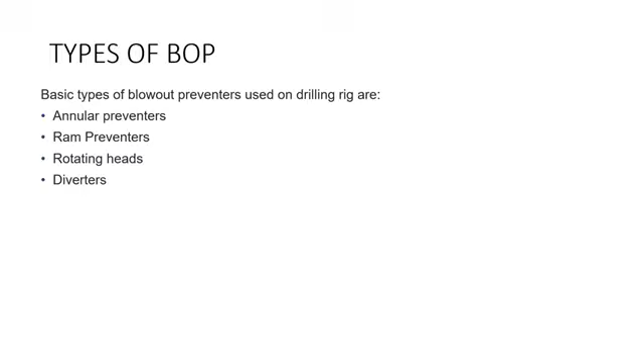Now let's discuss well control equipment. The very first thing we will be discussing is the blowout preventer. Types of blowout preventer, as we all know, include annular preventer, ram preventers, rotating heads, and diverters.

Now coming to the annular preventer, it can be closed on drill pipe, drill collar, casing pipes, square and hexagonal kelly, tapered pipes, tool joints, wire line, and on open hole in case of emergency. So any kind of tubular present in the well, the annular preventer can close the well.

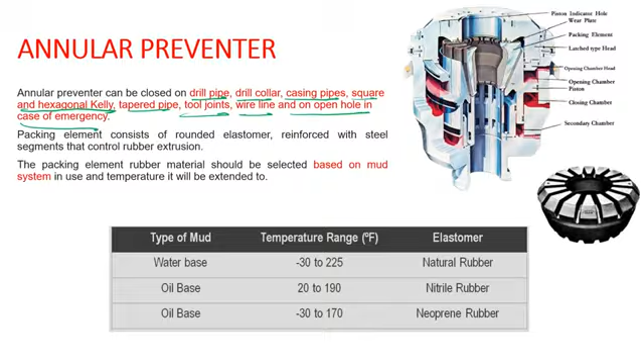The packing element consists of a rounded elastomer reinforced with steel segments that control rubber extrusion. The packing element looks somewhat like this. It is an elastomer reinforced with steel - you can see the steel elements here. Basically it's an elastomer reinforced with steel segments so that we can control the rubber extrusion. The bottom part is the rubber extension, and these segments are the steel part.

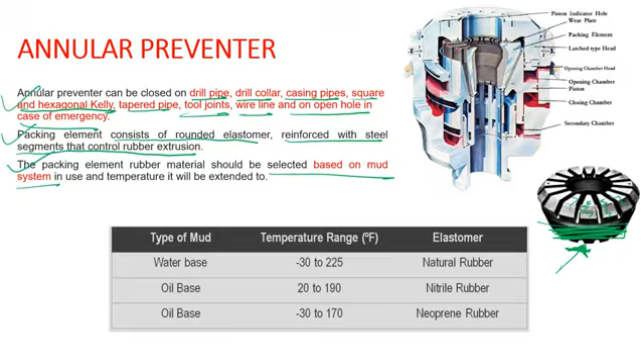Now the packing element rubber material should be selected based on the mud system used and the temperature it will be exposed to. This is a very important point, and this is a very important chart and table.

If I am using a water-based mud and the range of reservoir temperature is expected to be within -30 to 225 degree Fahrenheit, we can go for a natural rubber elastomer. Whereas if we are going for an oil-based mud and the temperature lies between 20 to 190 degree Fahrenheit, nitrile rubber should be used. Similarly, if I am going for oil-based mud and -30 to 170 degree Fahrenheit is expected, we would go for neoprene rubber.

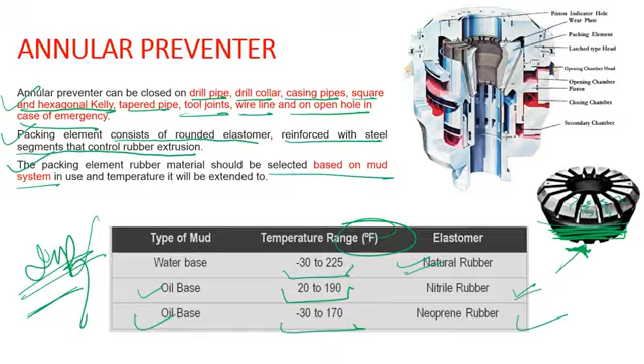This same table will come again when we discuss PCP, progressive cavity pump. At that time, the bottom hole pump assembly that we have - in PCP we have a rotor and a stator assembly - we will discuss this same thing again.

Now coming to ram type preventer, pipe rams. The ram type preventers are designed to seal the annulus by forcing two rams from opposite ends to seal the object in the wellbore, thus closing the annulus.

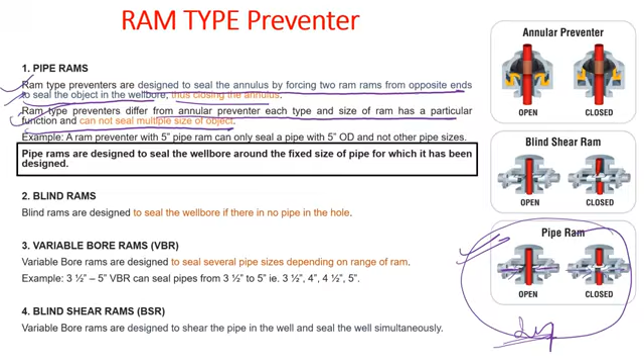Now, ram type preventers differ from annular preventer - each type and size of ram has a particular function and cannot seal multiple sizes of object. For example, if a ram preventer with 5-inch pipe ram is used, only a pipe of 5-inch OD can be closed. If a ram is capable of closing a 5-inch OD drill pipe, then that particular ram will be used to close that 5-inch OD pipe only. It cannot be used for different kinds of ODs - only for 5-inch is it designed.

Pipe rams are designed to seal the wellbore around the fixed size of pipe for which they have been designed. This is a very important point. Unlike the annular, where we were able to close the well with any sort of tubular, or even in emergency if there is no tubular in the wellbore, with a pipe ram it is always designed to seal the wellbore of a fixed size.

Now talking about the second type, which is blind rams. Blind rams are designed to seal the wellbore if there is no pipe in the hole.

Third point, which is variable bore rams. Variable bore rams are designed to seal several pipe sizes depending on the range of the ram. This variable bore ram, or VBR, is an improvement over pipe rams - these are pipe rams only, but now VBR can seal several pipe sizes. For example, a 3.5 to 5-inch VBR can seal pipes from 3.5-inch, 4-inch, 4.5-inch, up to 5-inch.

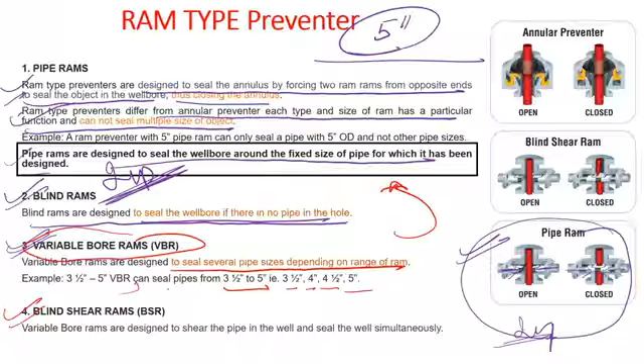Now coming to the fourth point, which is blind shear rams. Blind shear rams are designed to shear the pipe in the well and seal the well simultaneously. That means it will both shear as well as blind. You can see in this particular figure, this is a blind shear ram.

Now from both ends the rams are coming in, and you can see that it has now sheared the pipe on the top end and the bottom end. So what a blind shear ram does is shear the pipe, and once it gets sheared, it closes and gets blind, completely shutting the well.

Unlike the pipe ram, which was not shearing, it was just closing the well by completely covering the OD of the drill pipe. But in a blind shear ram, you can completely shear the drill pipe and shut the well.

Now, when are blind rams used? Blind rams are used when there is no drill pipe in the hole. Only at that time can I go for a blind ram. Annular preventer, on the other hand, can be used when there is any sort of drill pipe or any tubular present in the wellbore. At that time we go for the annular preventer.

In the annular preventer, you can see rubber elements will be there, and on activating it, the rubber elements will come close to each other and close the well.

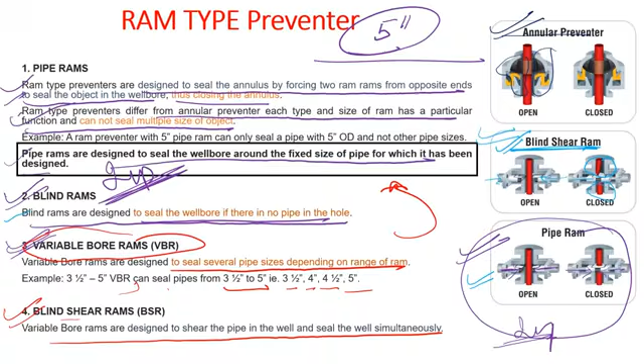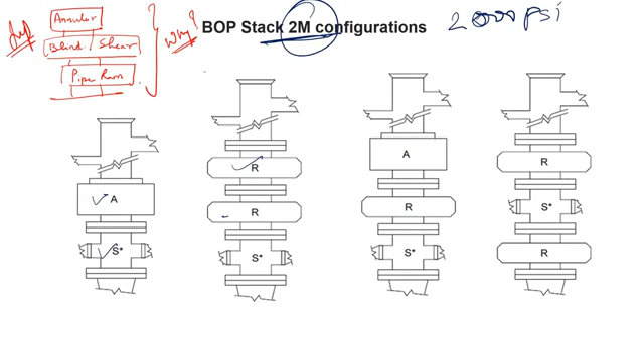Now coming to BOP stack configuration, this is for 2M configuration, that means 2000 psi rating of BOP. So here A indicates annular, S indicates drilling spool, R indicates pipe rams. For a 2M you can go for either one drilling spool and one annular BOP.

The second configuration is one drilling spool and two rams. The third assembly is one drilling spool, one annular, and one ram. The fourth assembly is a ram below the drilling spool and a ram above the drilling spool. So these are the configurations for a 2000 psi working rating pressure BOP.

Now this is a very important question, a GATE type question. Whenever you are going for a shear ram in your system, it is compulsory to have a pipe ram below it. Let's assume a case that I have a shear ram, and above it I have a pipe ram.

Let's say this is my drill string, this is my bit, this is my wellbore. Now let's say by any chance my well has taken a kick and I had to activate the BOP, and my annular didn't work, so for some reason I compulsorily have to engage my shear ram.

At that time, if I engage my shear ram, I know that the entire drill pipe from this point will be sheared. Because of shearing, this drill pipe may fall into the wellbore, and this can result in damage to the wellbore, which is an obvious issue. Now if I want to retrieve that drill string, I have to go for a fishing job.

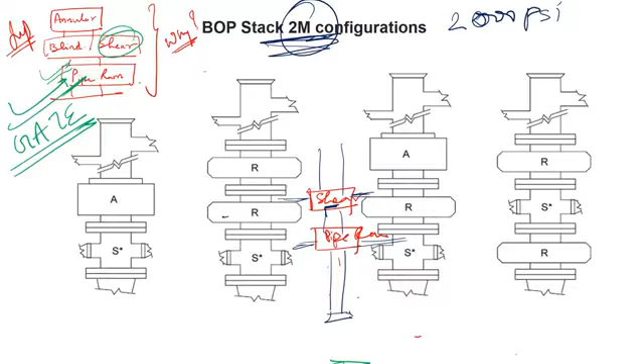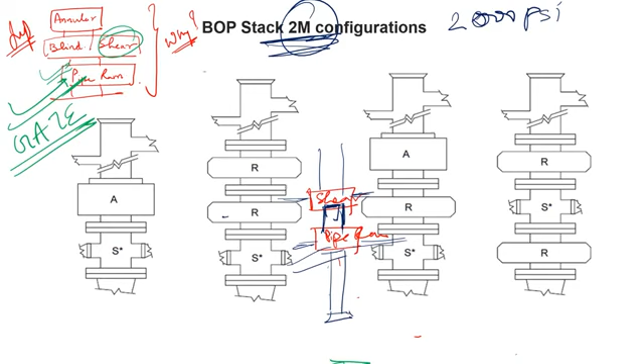Again, let this be the drill pipe. Now in this case, if I am engaging my shear ram, I will simultaneously engage my pipe ram also. So if the drill pipe gets ruptured because of shearing, this pipe ram will hold the entire drill string intact, meaning it will not allow the drill string to fall into the wellbore. Got it? So this is a very important point, and this particular question can be asked in GATE.

Now coming to 3M and 5M. 3M means 3000 psi of working pressure and 5M means 5000 psi of working pressure. If I am going for those kind of stack configuration, then I can have an annular preventer, two ram preventers, and a drill spool.

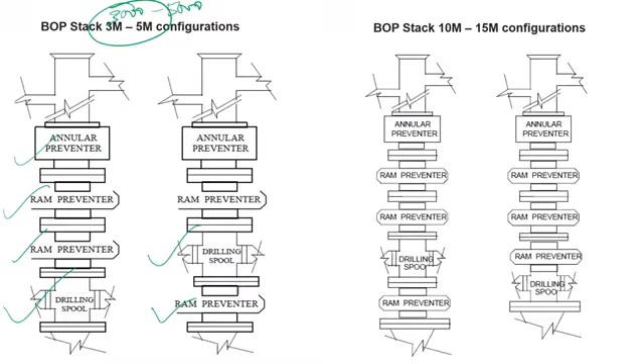Another version is I can have a drill spool, below that a ram preventer, above that another ram preventer, and above that an annular preventer.

Now for a configuration of 10M to 15M, I can have a ram preventer below my drill spool, two ram preventers above my drill spool, and one annular preventer. This particular configuration can have a drill spool at the bottom, 3 ram preventers, and 1 annular BOP. So you can have different types of configuration based on the company's SOPs and the API specifications.

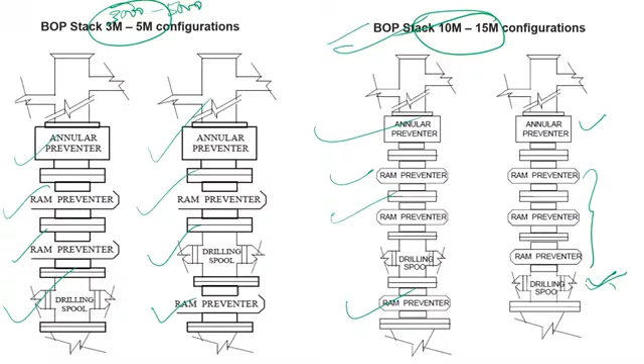Now this is a schematic for a BOP. Let this be the drill floor, and this is my annular preventer, blind shear ram, 5-inch pipe ram, and drilling spool. Again, I will have a pipe ram below because I have a blind shear ram - that means compulsory I will have a pipe ram below. Let this be the casing head.

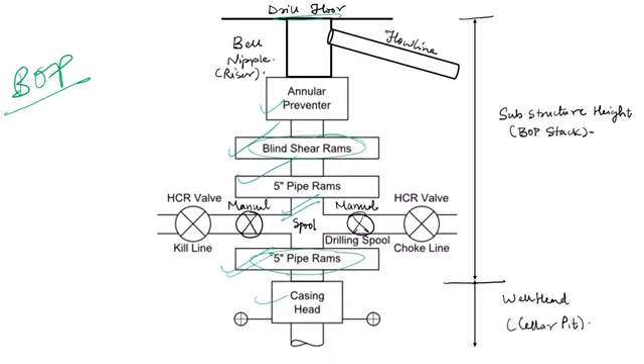Now this side is my kill line. I have this manual valve, and I have this HCR valve, which is a hydraulically controlled gate valve. This is my kill line, and similarly I will have a choke line over here.

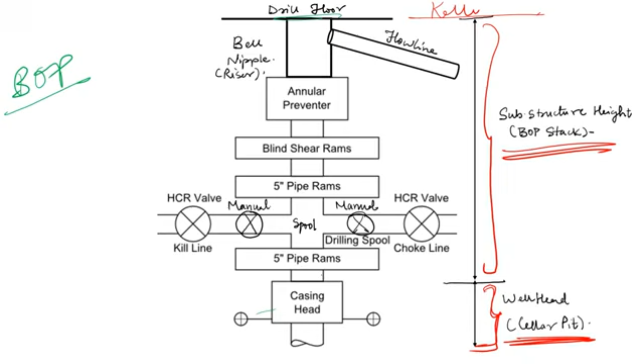Now this would be my wellhead case, or this will be a cellar pit. This particular depth is cellar pit. This particular height is my substructure height - the height from the drill floor, or the Kelly bushing, right from the Kelly bushing to the top of the wellhead. So that would be my substructure height or BOP stack height.

And from the annular preventer, I will connect a bell nipple or a riser towards my drill floor, and from the drill floor I will have a flow line. Again we know the journey - from the flow line it goes to the possum belly, shale shaker, then to the drilling fluid control system. So this is a simple schematic of a BOP configuration.

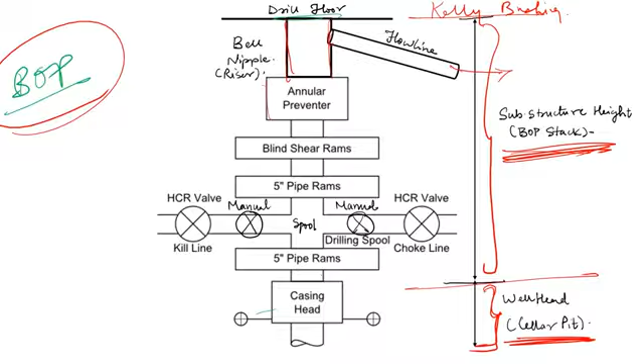Now coming to diverters. Diverters are used in top hole drilling to divert the flow in case of a shallow gas kick or a water kick. A very important term - it is used in top hole drilling only, to divert the flow in case of a shallow gas or a water kick.

Diverter is never used to create a back pressure on the wellbore, as compared to annular BOP, pipe ram BOP, or blind shear BOP, where we were able to give back pressure. But in my diverter case, I am never able to create any sort of back pressure - that's a very important point to take into consideration. Diverters are simply low pressure annular preventers - these are annular preventers only, but low pressure, and they cannot give back pressure on the wellbore.

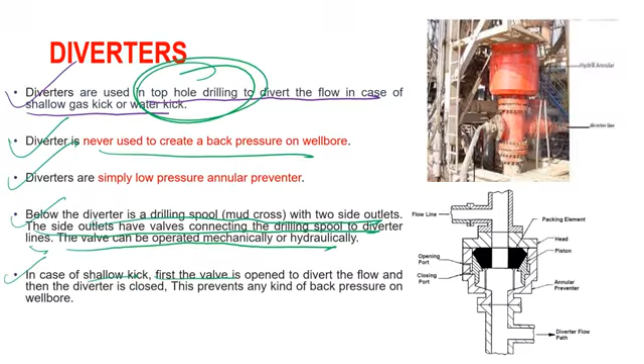Below the diverter is a drilling spool, a mud cross with 2 side outlets. The side outlets have valves connecting the drilling spool to the diverter lines. The valve can be operated mechanically or hydraulically. Now, in case of a shallow kick, the first valve is opened to divert the flow, and then the diverter is closed. This prevents any kind of back pressure on the wellbore.

Now you can see this is a schematic of a diverter. Let's say my drill string was over here - from that BOP only I will have a drill string. So let's say now I have to close the well. Any shallow gas kick has come, so I need to close the well. What I do is activate this particular rubber element, and thus this rubber element will completely shut my wellbore.

Now once I shut this wellbore, I don't have any access of flow line, so my drilling mud will not go to this flow line, because my annulus is closed. Instead of that, the mud will be flowing through this diverter flow path.

So that's this point, the first valve is open to divert the flow. That means there will be a valve over here. We will open that valve so that I can divert my drilling mud through this diverter flow path, and then the diverter is closed.

The sequence is important here. First I bring this particular thing in lineup, I open the diverter flow path valve, and then I activate my diverter annular BOP, and then I can go for a well shut. That's how you go for well shutting in a diverter case.

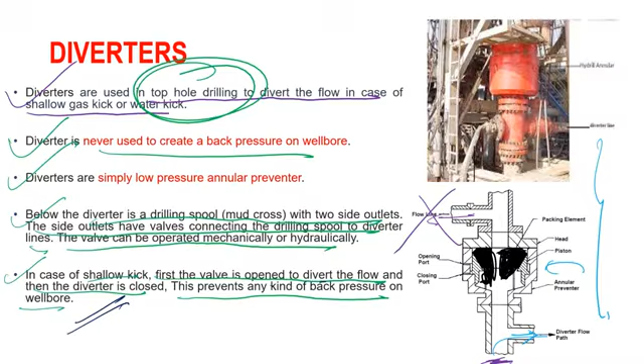A very crucial point is that a diverter is never used to give a back pressure on the wellbore. It's a very important point. Now coming to full opening safety valve.

FOSV or full opening safety valve is installed on the drill pipe in case we get a kick. It is always kept ready on the rig floor in open condition. In case of kick, we stab the FOSV on the drill pipe in open condition so that the upward moving flow of fluid through the drill pipe can pass through the valve and does not create difficulty in making up the valve on the drill pipe. Always in open condition we stab the FOSV onto the drill pipe. Once the valve is installed, we can use the Allen key to close the valve.

Allen key is a tool which is like this, almost L-shaped. So by using this Allen key, I can close my FOSV.

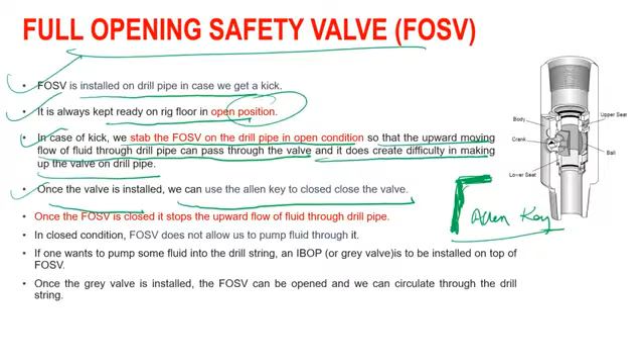Once the FOSV is closed, it stops the upward flow of fluid through the drill pipe. Once it is completely closed using the Allen key, the upward flow of fluid through the drill pipe can be stopped. Now, in closed condition, FOSV does not allow us to pump fluid through it. It's a very crucial point.

Now, if one wants to pump some fluid into the drill string, an IBOP or a gray valve is used to install on the top of the FOSV. Let's say in some case, once my well is shut I have to circulate my drill fluid through the drill string. Let's say I am talking about a driller's method of well killing, where I was supposedly pumping my drill fluid through my drill string.

In that method, let's say on top of the drill string I had installed my FOSV, and using the Allen key, I close the FOSV. Once FOSV is closed, I cannot pump through it. So to avoid that, we use an IBOP, an internal BOP, or gray valve, which we install on the top of FOSV. Once the gray valve is installed on top of FOSV, now the FOSV can be opened and we can circulate into the drill string.

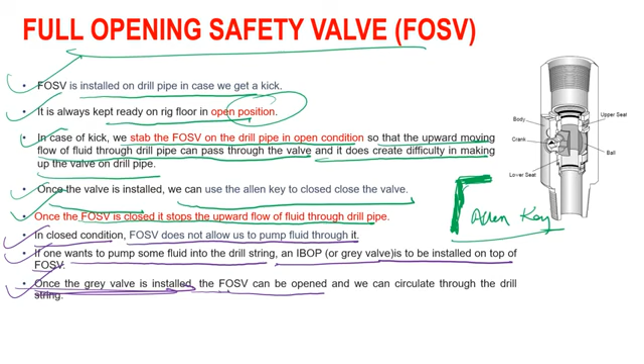Now let's look at IBOP or gray valve. Gray valve is an NRV, a non-return valve. Only one directional flow is allowed. It is also always kept ready along with the FOSV on the rig floor, in open condition.

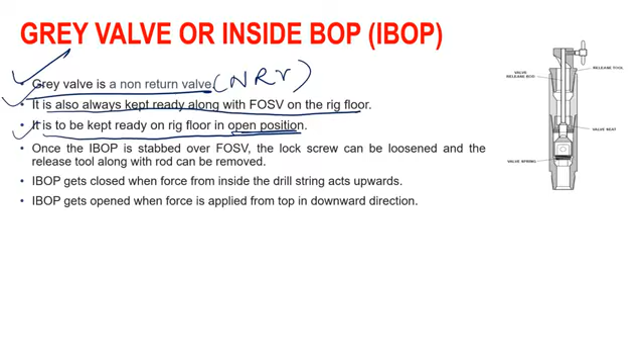Once the IBOP is stabbed over the FOSV, the lock screw can be loosened and the release tool along the rod can be removed. IBOP gets closed when the force from inside the drill string acts upwards; if any fluid is coming from the downward side, my IBOP will get closed. And IBOP gets open when the force is applied from the top in the downward direction. At this time my IBOP will open, and in this direction my IBOP will close, because we don't want any fluid coming out from this particular portion.

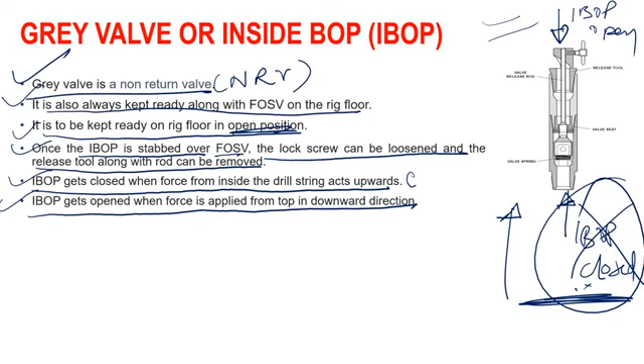This is a very important point. So IBOP will open only when I am giving some force from the top direction, from the upward direction on the downward side. Got it? Now talking about the float valve, which is also a critical well control equipment.

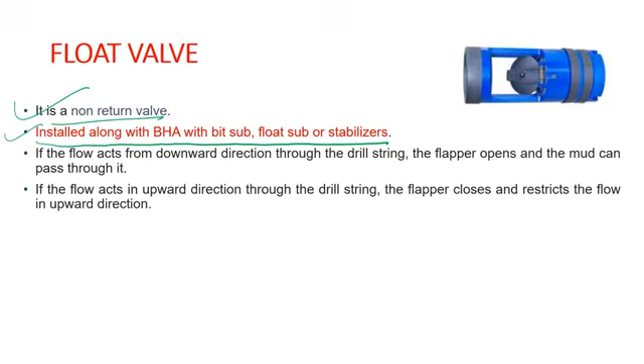It is a non-return valve installed along with the bottom hole assembly with bit sub, float sub or stabilizers. If the flow acts from downward direction through the drill string, the flapper opens and the mud can pass through it. It is similar to a flapper like arrangement.

I will be having this flapper. Let's say this is my flapper, and there will be some sort of a restriction over here. Let this be the bottom assembly part. Now this flapper will open whenever I am pumping fluid from above, at that time my fluid will go through this and my flapper will go down. Now let's say by case from the bottom part my fluid is coming up, at that time this flapper will get closed because of this restriction.

Got it? So that's what has been written. If the flow acts from the downward direction to the drill string, the flapper opens and the mud can pass through it. If the flow acts in upward direction to the drill string, the flapper closes and restricts the flow in the upward direction.

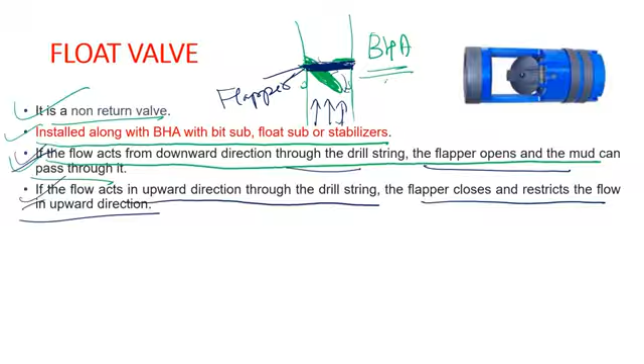Got it? Now coming to choke manifold. Choke manifold is a set of valves. A Coflex hose connects the choke manifold to wellbore annulus through the choke line. When the BOP is closed, choke line valve can be opened and flow can be diverted to choke manifold.

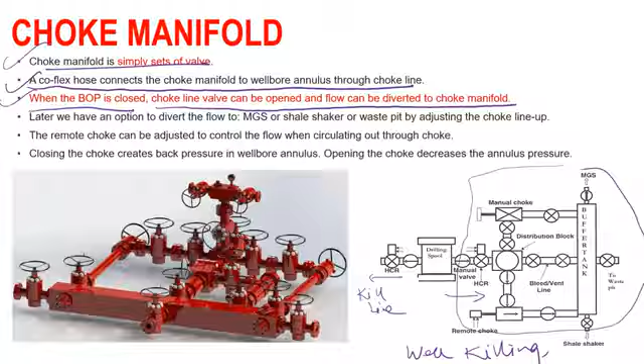As this particular thing, I think we have seen during my well killing session, we have seen this particular diagram. So this entire portion is my choke manifold, and this is my choke line. This is my choke line and this is my kill line. Let this be the kill line, and this is my choke line. And from the choke line, it gets connected to the choke manifold.

Now later we have an option to divert the flow to MGS, a mud gas separator, or a shale shaker or a waste pit by adjusting the choke lineup. So you can see that there are two routes. I can either go for a manual choke or I can go for a remote choke. If I'm talking about remote choke, then if my fluid takes this journey, from buffer tank it can go to a mud gas separator, or it can go to a waste pit, or it can go to a shale shaker. Alright, so that's what it has been written over here.

The remote choke can be adjusted to control the flow when circulating out through the choke. There will be a remote control panel from where we can control the remote choke, the opening and closing of remote choke. Now, closing the choke creates back pressure in the wellbore annulus, and opening the choke decreases the annular pressure. It's a very obvious point.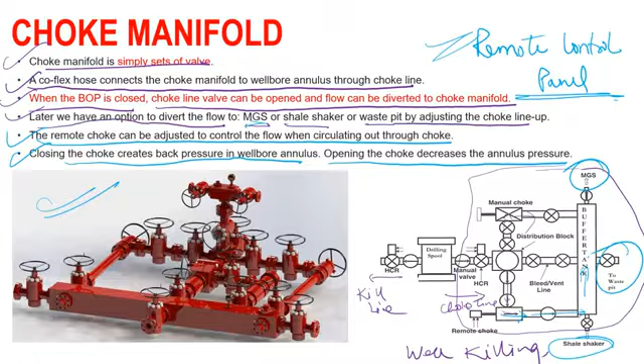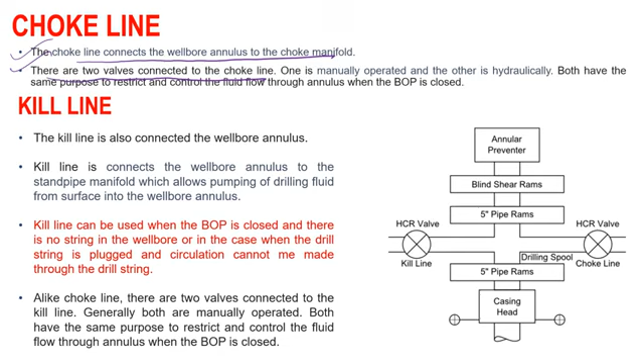All right, so this is what a choke manifold looks like in real field, and this is the schematic of a choke manifold. Now coming to choke line and kill line, let's discuss each one of them. Choke line connects the wellbore annulus to the choke manifold. There are two valves connected to the choke line. One is manually operated and other is hydraulically operated. Both have the same purpose, to restrict and control the fluid flow through the annulus when the BOP is closed.

Again, I had discussed this same thing before. Let's say this is my drilling spool. At that time, let this be the manual valve, and let this be the HCR valve. It is always necessary to have a manual valve in front of the HCR valve. The reason is, let's say by any case my HCR valve gets damaged or requires any sort of repair, at that time what to do is close my manual valve and remove this HCR valve for repair work. So it's a very important point that my manual valve will always be in front of my HCR valve. This be the drilling spool, and my manual valve will always be in front of HCR valve. Very, very important concept. Now coming to kill line, let's talk about kill line.

The kill line is also connected to the wellbore annulus. Again, this is the kill line and this is my choke line. The kill line connects the wellbore annulus to the standpipe manifold, which allows the pumping of drilling fluid from surface.

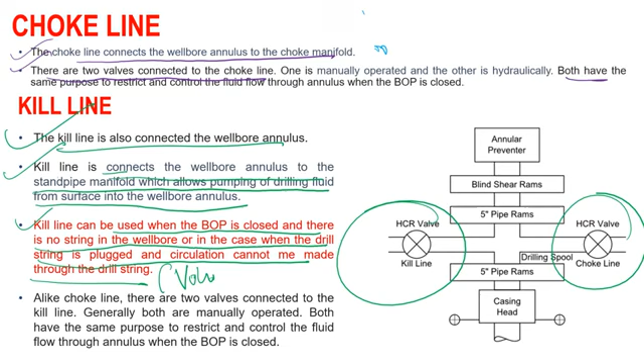To the wellbore annulus. Now, the kill line can be used when the BOP is closed and there is no string in the wellbore, or in case the drill string is plugged and circulation cannot be made through the drill string. This particular case is my volumetric well control method. We have discussed volumetric well control before, and at that time we can go for the kill line.

Now unlike the choke line, there are two valves connected to the kill line. Generally, both are manually operated. Both have the same purpose: to restrict and control the fluid flow through the annulus when the BOP is closed.

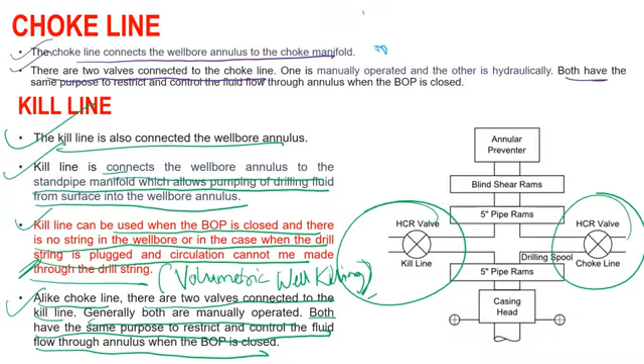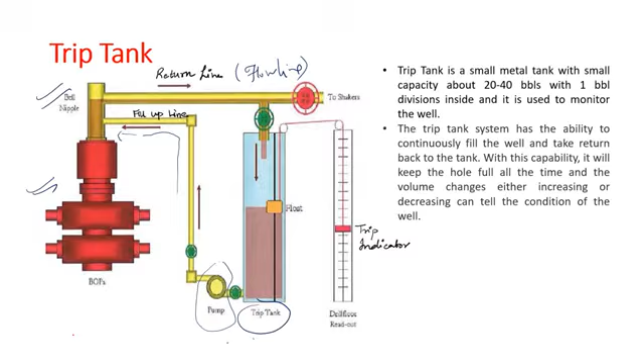Now let's discuss the trip tank. You can see this is the BOP, this is my bell nipple, and this is my return line or flow line. From one point of my flow line, there will be a line connected to a trip tank, and from the trip tank there will be a pump pumping fill up mud through this fill up line, which will again connect to the bell nipple. Now this is a particular trip indicator readout.

There will be a trip indicator on the drill floor which will indicate the level of my trip tank. Now let's see what the trip tank is. The trip tank is a small metal tank with small capacity, about 20 to 40 barrels with 1 barrel divisions inside, and it is used to monitor the well.

Now the trip tank system has the ability to continuously fill the well and take return back to the tank. With this ability, it will keep the hole full at all times, and the volume changes, either increasing or decreasing, can tell the condition of the well. So this is the purpose of a trip tank - it has the ability to continuously fill the well.

We have discussed in my session 1 about wet displacement, wet pull out, or dry pull out. At that time we were calculating what will be my hydrostatic reduction when I pull out dry versus when I pull out wet.

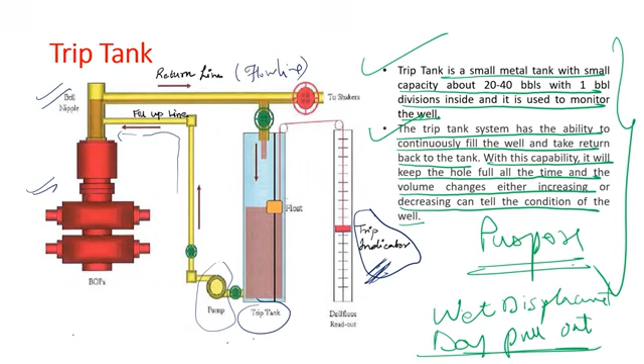So whatever corresponding hydrostatic loss has been experienced, I will try to fill the hole corresponding to that hydrostatic loss. Let's talk about the accumulator unit. It's a very important unit, and it is a very important part of well control equipment. Now, the accumulator, or commonly known as the Koomey unit, is a unit used to hydraulically operate rams, hydraulically operate the annular BOP, hydraulically operate my HCR valves and other hydraulic equipment.

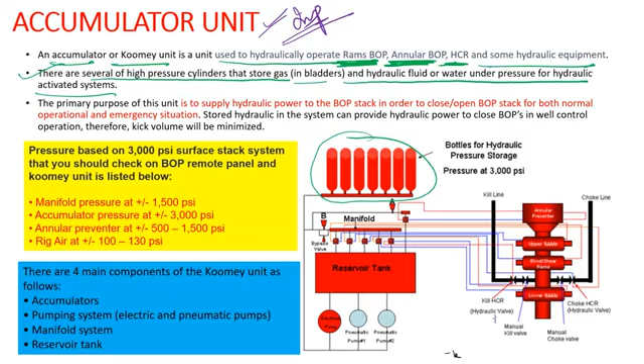Very important portion. There are several high pressure cylinders that store gas in bladders and hydraulic fluid or water under pressure for hydraulic activated systems. So these are the bottles or cylinders that will store high pressure gas - the bottles for hydraulic pressure storage are kept at 3000 psi.

Now, the primary purpose of this unit is to supply hydraulic power to the BOP stack in order to either close or open the BOP stack for both normal operational as well as emergency conditions. That means we will supply this hydraulic power at times of emergency situations or at times of testing.

There will be pressure testing that we can carry out once a month, or at different periods of time we will be carrying out this pressure testing. So at that time we will be using this particular accumulator unit. Now, the stored hydraulic power in the system can provide hydraulic power to close BOPs in the well control operation. Therefore, kick volume will be minimized.

Now, pressure based on a 3000 psi surface stack system that you should check on the BOP remote control panel, and the Koomey unit, is listed as below. That means the manifold pressure - this is my manifold. See in this diagram, this is my manifold.

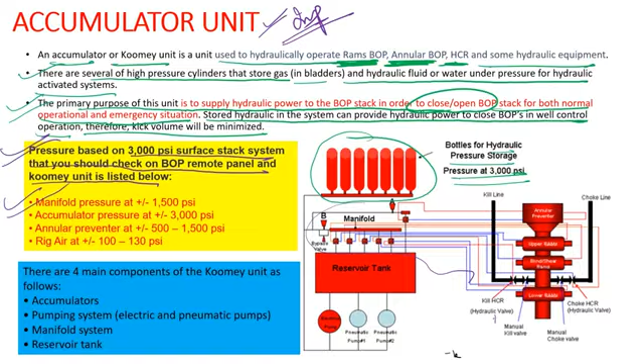These small lines connecting, or this small tubing connecting to the BOPs, these are my manifold lines, and these manifold lines need to be kept at 1500 psi. My accumulator pressure means this bottle will be charged at 3000 psi - it is a compulsion. Now in order to open, so in order to close the annular preventer, at that time I will give 500 to 1500 psi.

Okay, and for the rig, air is maintained at 100 to 130 psi. And if I am going for annular, as we have mentioned, it will have to give 500 to 1500 psi pressure to close the annular BOP. Similarly, if I am going for any ram, like a pipe ram, variable bore ram, or blind shear ram, at that time my pressure would be around 3000 psi.

Now the four main components of a Koomey unit are accumulators, pumping system, manifold system, and reservoir tank. All right, so let's see here.

The 4 units are accumulators. See, these are my accumulator system. This is my accumulator, where the high pressure bottles are, which store high pressure gas.

Pumping system. See, I have a pumping system here. I have basically 2 types of pumps, electrical pump and pneumatic pump, and I have 2 pneumatic pumps. One is in reserve.

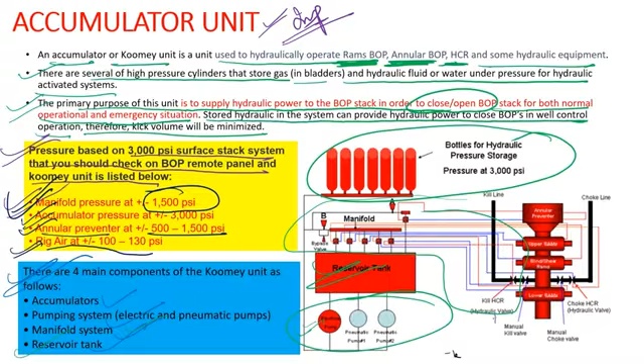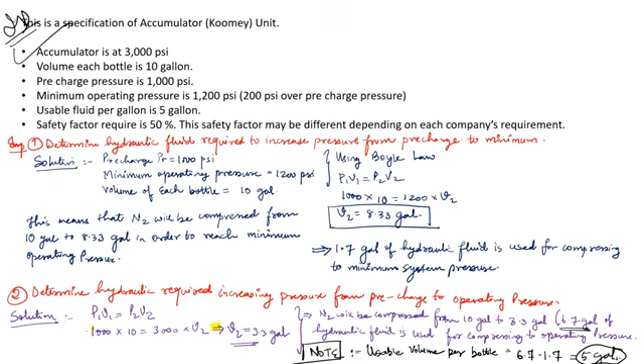Now let's discuss some more about the accumulator unit. So this accumulator is at 3000 psi. Again, very important points, you need to remember these things.

Volume of each bottle, whatever storage we have, will have 10 gallon of storage capacity. Pre-charge pressure is 1000 psi. Very important point, pre-charge pressure of the accumulator unit should be 1000 psi. Minimum operating pressure is 1200 psi, which is 200 psi over pre-charge pressure. That means for conducting any sort of activity we need to have 1200 psi.

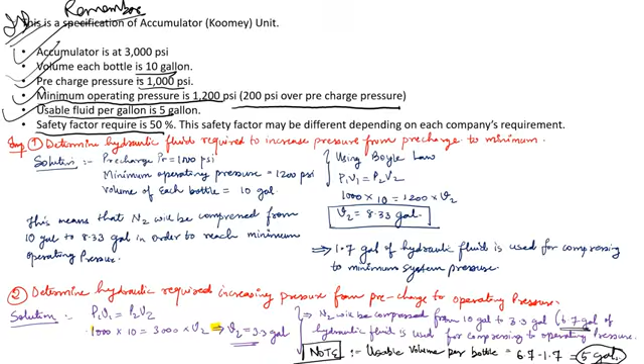Usable fluid is 5 gallon, I will prove this point. And safety factor required is 50%. This safety factor may be different depending on each company's requirement.

Now let's discuss 2 very important points: first, we need to determine hydraulic fluid required to increase pressure from pre-charge to minimum. We know my pre-charge pressure is 1000 psi and my minimum pressure is 1200 psi. So what we need to find out is the hydraulic fluid required to increase my pressure from pre-charge to minimum.

Pressure is 1000 psi, minimum operating is 1200 psi, volume of each bottle is 10 gallon. So by using Boyle's law, P1V1 equals P2V2, we can calculate my volume V2 will be 8.33 gallon. So 1000 into 10 equals 1200 into volume of V2, giving V2 equal to 8.33 gallon. This means the nitrogen will be compressed from 10 gallon to 8.33 gallon in order to reach minimum operating pressure.

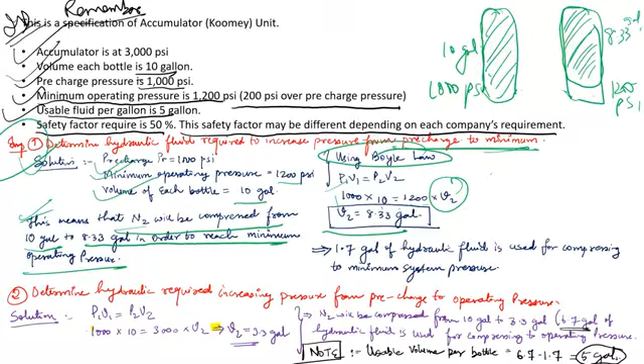Let's say I had complete 10 gallon of nitrogen over here, at 1000 psi. Now to reach 1200 psi, what I will do is compress it to 8.33 gallon, so that I can get my 1200 psi. And so, the hydraulic fluid point is here: 1.7 gallon of hydraulic fluid is used for compressing this system to minimum system pressure. That means I have 10 gallon for 1000 psi, and 8.33 gallon for 1200 psi. So 10 minus 8.33 gives me 1.7 gallon. So 1.7 gallon of my hydraulic fluid is used up to reach my minimum system pressure.

Now let's talk about the second point, which is determining the hydraulic fluid required in increasing pressure from pre-charge to operating pressure. As we know, my pre-charge pressure is 1000 psi and my operating pressure is 3000 psi. Let's do the calculation. Again using the same Boyle's law, P1V1 equals P2V2, 1000 into 10 equals 3000 into V2. So my V2 turns out to be 3.3 gallon.

V2 turns out to be 3.3 gallon. Now the nitrogen will be compressed from 10 gallon to 3.3 gallon. That means 6.7 gallon of my hydraulic fluid is used up for compressing till the operating pressure. Got it? So let's discuss it in this diagram also.

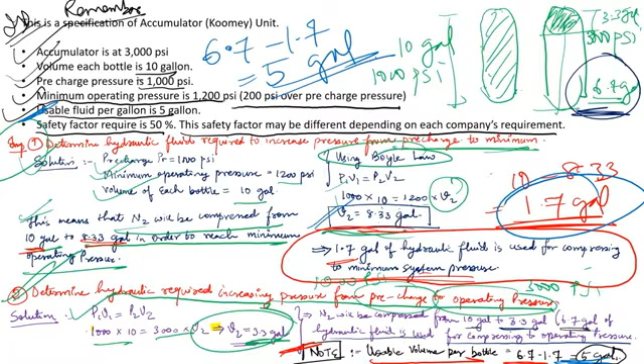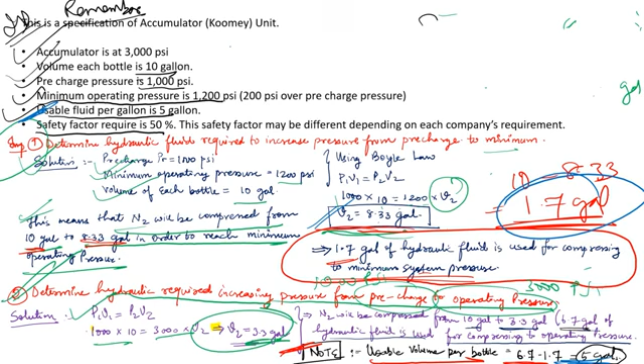Again, you guys have to remember this, it will be better that you remember this. My minimum operating pressure is 1200 psi, my pre-charge pressure is 1000 psi, and usable fluid per gallon is 5 gallon. Accumulator pressure is 3000 psi, and my volume per each bottle is 10 gallon. You need to remember these things.

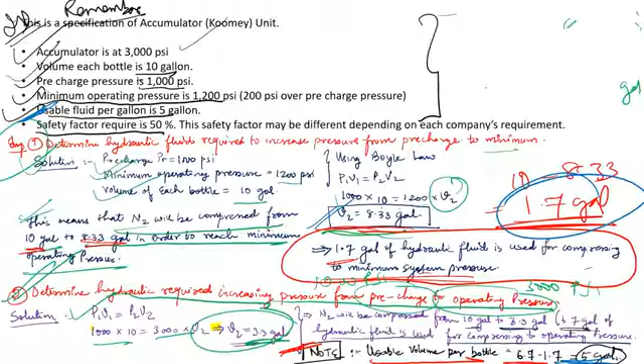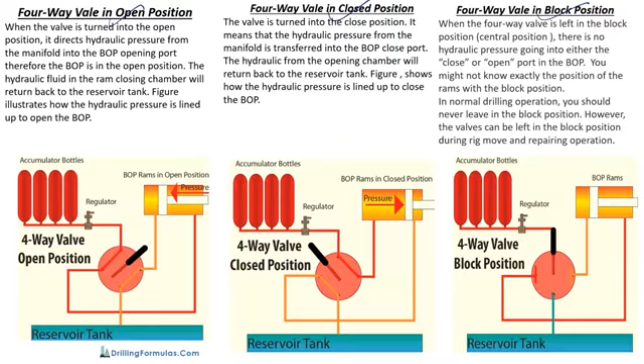Now let's say I want to open my BOP. When the valve is turned into the open position, it directs the hydraulic pressure from the main manifold into the BOP opening port. See, from the manifold, my fluid has been diverted to the BOP opening port. This is my BOP opening port, and from the manifold it is being transferred to this port. Therefore, the BOP is in open position.

The hydraulic fluid in the ram closing chamber will return back to the reservoir tank. So you can see that this is my ram closing chamber. From the ram closing chamber, my fluid is now entering into my reservoir tank. So this figure illustrates how the hydraulic pressure is lined up to open the BOP. Got it?

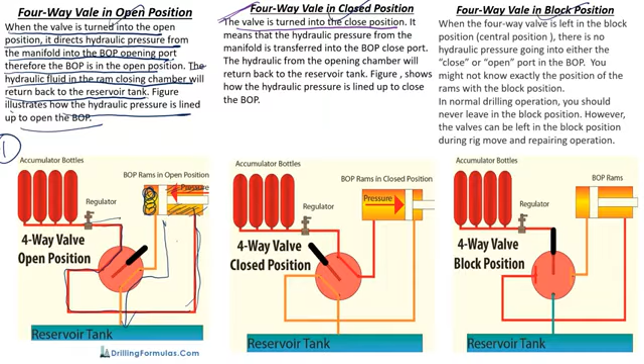Now let's discuss this four-way valve in closed position. The valve is turned into the closed position. Again, look at this, this is my open position, this will be my closed position. Now when it is in closed position, it means that the hydraulic pressure from the manifold is transferred to the BOP closed port.

From the manifold, my hydraulic fluid is now transferred to the ram closing port, the BOP closing port, and the hydraulic from the opening chamber will return back to the reservoir tank. See, this is my opening chamber, and from the opening chamber whatever hydraulic is there, it will now go to the reservoir tank. Got it? Figure shows how the hydraulic pressure is lined up to close the BOP.

So the primary difference between both is when I want to close the BOP, at that time the hydraulic from the accumulator unit will flow to this BOP closing port. And when I have to open the BOP, at that time the hydraulic fluid from the accumulator unit will go to the opening port of my BOP. Got it? So this is how four-way valve in open position and closed position works.

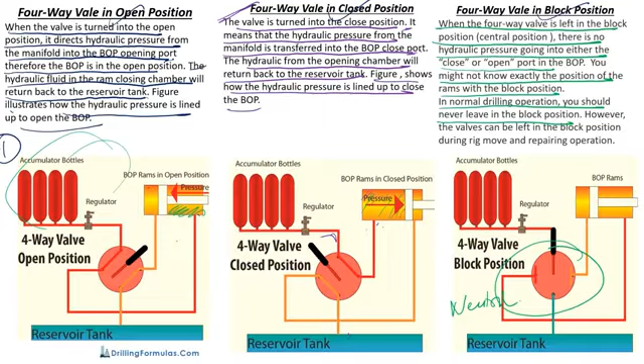Now let's discuss how this four-way valve in block position works. This is my block position or the neutral position. When the four-way valve is left in the block position or central position, there is no hydraulic pressure going into either the closed port or the open port. So you might not know exactly the position of the rams in block position. In normal drilling operation, you should never leave this in block position. However, the valves can be left in the block position during rig movement or repairing operation. So this is block position.

As we all know, if my well stream or fluid stream has a high amount of gas, and if I allow the fluid to travel a long distance, at that time more gas will be liberated from the system. Or else, if I give more momentum or more disturbances to that fluid stream, that will also lead to separation of gas.

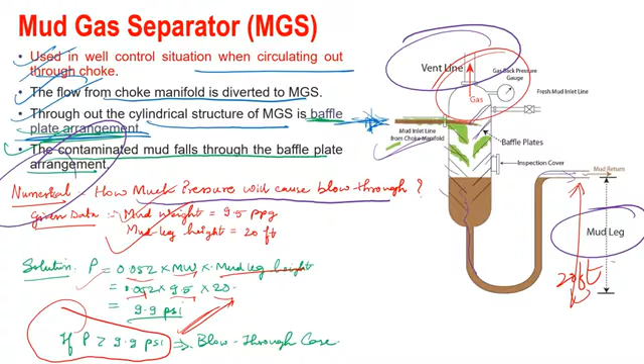Now let's discuss mud flow sensors. The mud flow sensor or flow line sensor provides the driller with real-time information on the flow out rate. It is installed on the flow line.

Now, it provides the driller his first indication of kick or increase in flow rate. Again, we all have seen that one of the positive signs of kick is increase in return flow. So the driller will identify whether it is a positive sign of kick through the recording he gets from the flow sensor kept on the flow line.

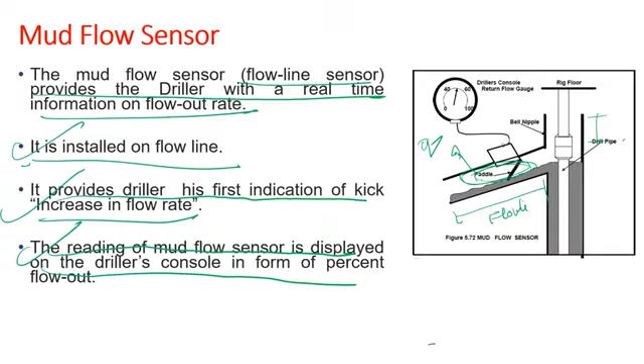Now the reading of the mud flow sensor is displayed on the driller's console in the form of percent flow out. Again, there is a driller's console kept at the drill floor, so there will be a recording of my mud flow over there.

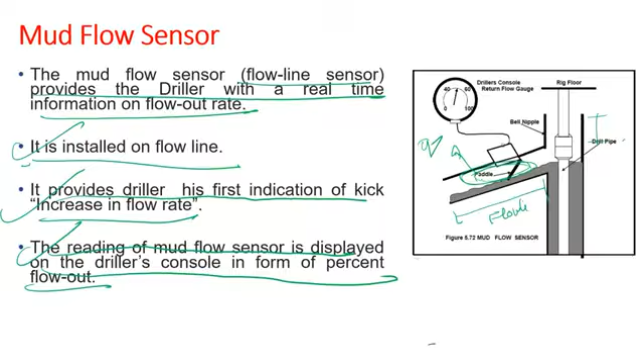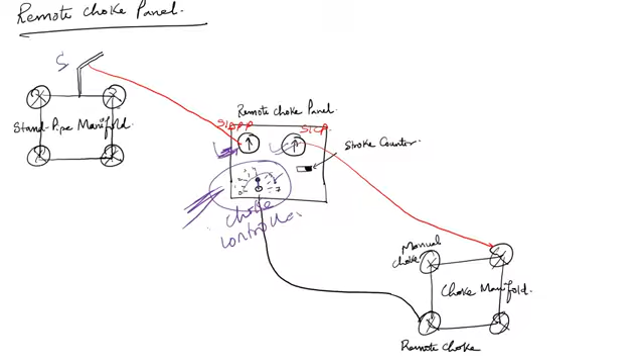At this point my SIDPP will be measured, and at this point my SICP will be measured. For SIDPP, the sensor would be at this point, in the standpipe manifold. For the SICP reading, my sensor would be fitted at the choke manifold point. So I will have a sensor at the choke manifold for SICP and a sensor at the standpipe manifold for recording SIDPP. That's the main purpose of putting this particular slide in the picture.

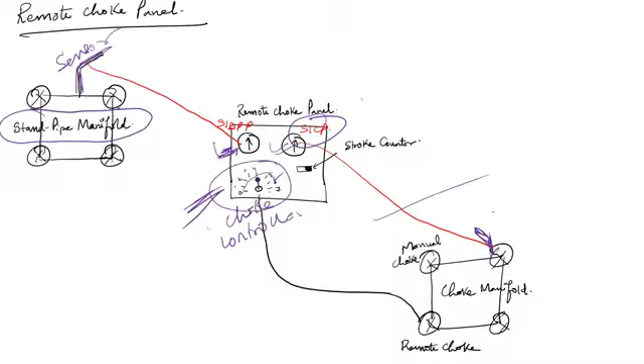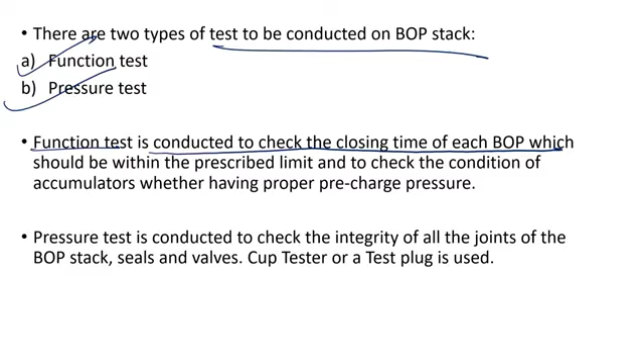So let's discuss testing of BOP. There are two types of tests conducted on BOP: function test and pressure test. Function test is conducted to check the closing time of each BOP, whether annular or pipe ram, which should be within the prescribed limit, and to check the condition of the accumulators, whether having proper pre-charge pressure or not. That's the function test for you.

Pressure test is conducted to check the integrity of all the joints of the BOP stack, the integrity of all the seals, and the integrity of all the valves in the BOP stack. A cup tester or a test plug is used. We will see what is a cup tester and a test plug in coming up slides.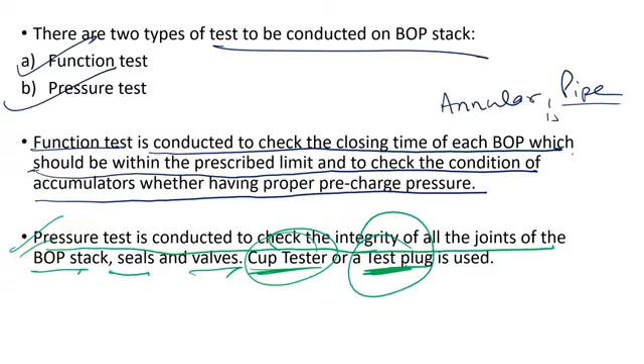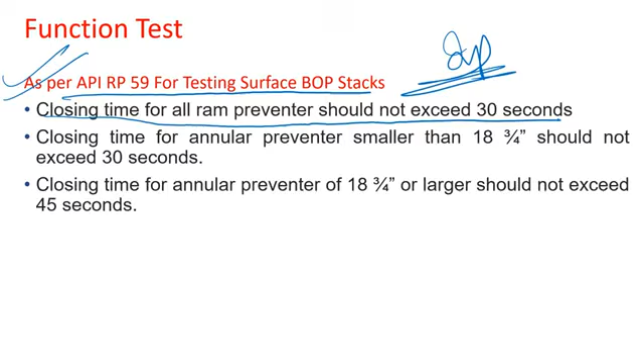Now let's discuss function test. As per API specification, for testing of a surface BOP stack, the closing time for all ram preventers should not exceed 30 seconds. Very important point. The closing time for an annular preventer smaller than 18 and 3/4 inch should not exceed 30 seconds, and the closing time for an annular preventer of 18 3/4 or larger should not exceed 45 seconds.

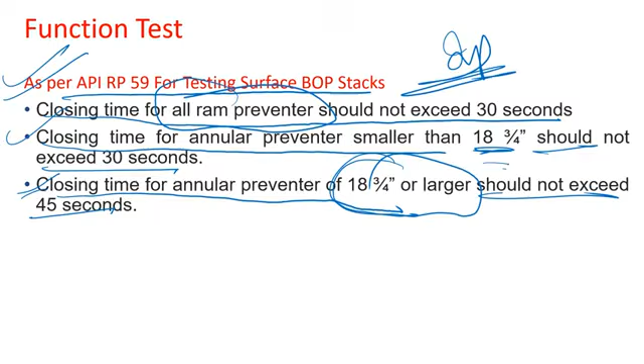Very important point: smaller than 18 3/4, it should not exceed 30 seconds, and larger than 18 3/4, if I am having any sort of annular BOP, it should not exceed 45 seconds. So you have to remember this particular thing. It is very important, and you have to remember these values.

Coming to pressure test, as per API specification recommended practice 59, my pressure test is conducted to check the integrity of all the joints of BOP. A cup tester or a test plug is used to conduct the pressure test. Clear water is used as a test fluid. My lower pressure test should be made at 200 to 300 psi, and the pressure should be held for a minimum of 5 minutes. So the lower pressure test means I will be pumping clear water at 200 to 300 psi for at least 5 minutes.

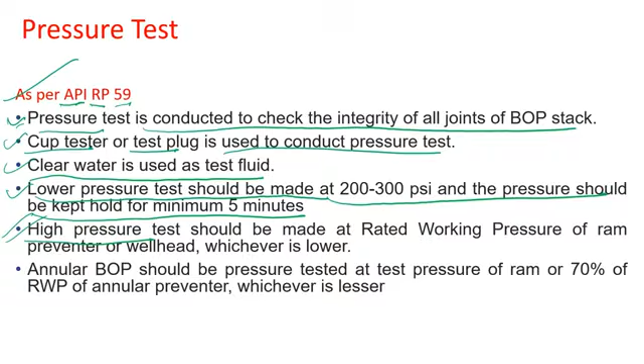For a higher pressure test, it should be made at rated working pressure, or RWP. If I am going for a higher pressure test, that means I should test it till the rated working pressure of the RAM preventers or the wellhead, whichever is lower.

The annular BOP should be pressure tested at test pressures of RAM or 70% of rated working pressure of the annular preventer. Let's say my annular preventer has 1500 psi rated working pressure. That means I will pressurize my fluid system to 70% of the rated working pressure to test my annular BOP. Again, these are all very important points you need to remember.

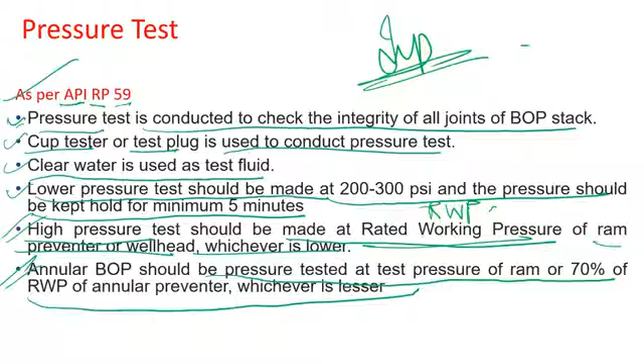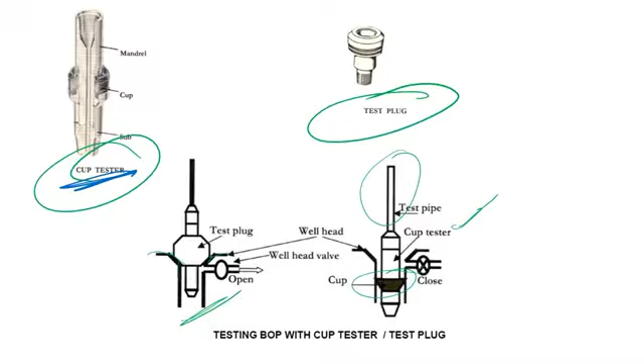Again, this is not that much of a critical point. The testing part is not critical. Just remember that there is a component called a cup tester or a test plug whenever we go for pressure testing of BOP. Okay, all right, so that's all for today.